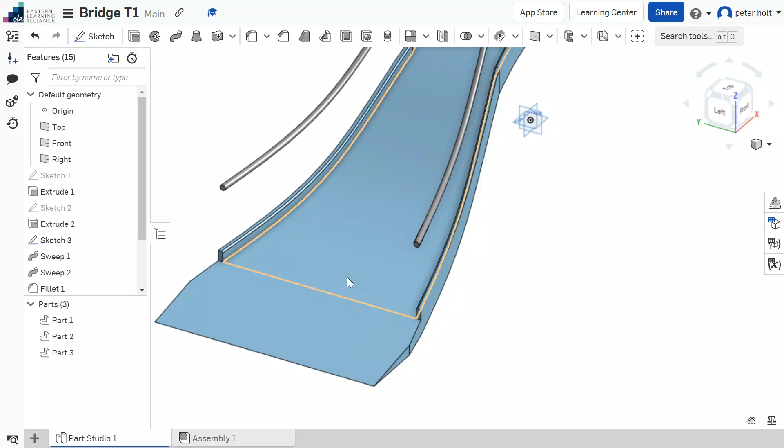Okay, welcome back. We are at the point at which we're ready to start making the uprights for our rail here, so that it's not just floating in midair, because that can't happen in reality. We've got to support it with something. So we're going to make the uprights for this.

Now, there's going to be a number of them and they're identical. So we don't want to spend a lot of time drawing lots of these shapes to extrude. What we want to do, once we've made one, is find ways of copying it. Now, we could do that by using the assembly. So we could draw one part and then we could use the assembly to position them. That would work absolutely fine.

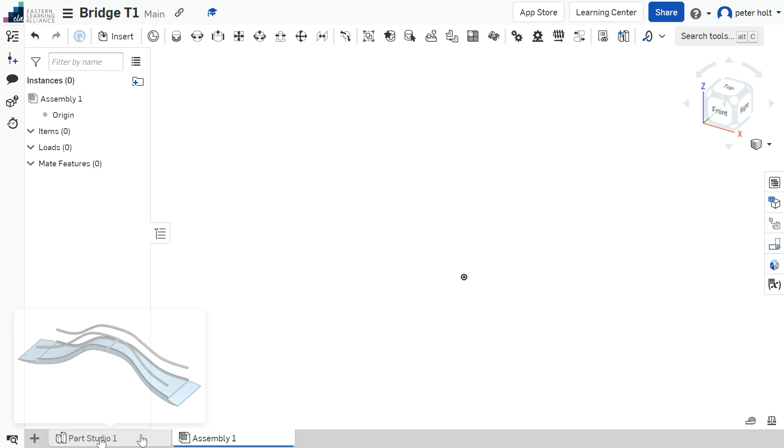The assembly drawing is, if you'll see at the bottom of the screen now, I pointed it out, next to your part studio, and you can just insert items that you have open. So we can literally pop in some of the items that we've made, and we can start lining them up and shaping them and putting them wherever. And it means that you can make objects and then assemble them afterwards.

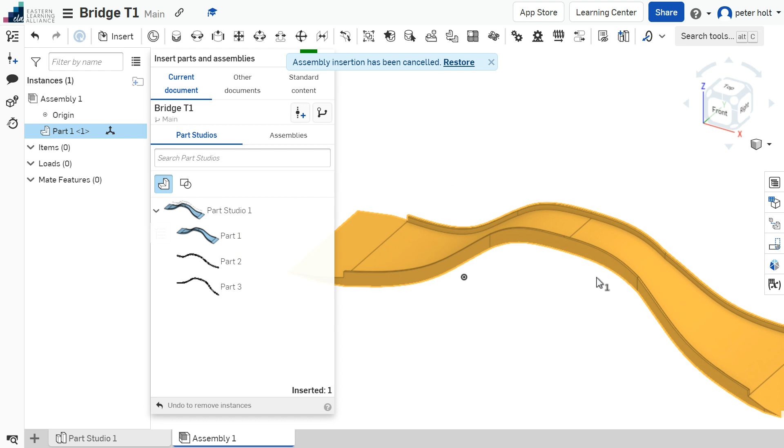So let's just close that. I'm not going to worry about it now. Let me just insert one of them actually, and I'll show you how to move it around. So once you've placed it, you click yes, I'm happy with that. And then you can select that object and you can move it so that you can get it set up the way you want it to be set up. We're not going to do that.

Instead, we're going to draw it all in the part studio because it's not that complex what we're doing. So we will use the part studio and we're going to use copying parts as a way of doing it. And again, there's lots of ways to do that, so we'll explore some of the options along the way.

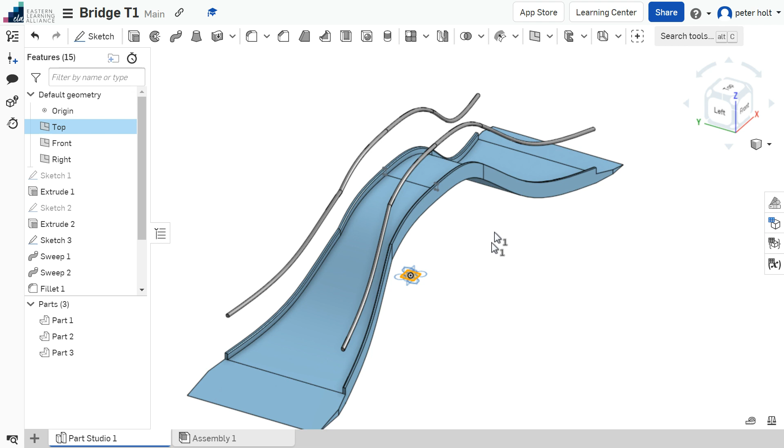So here I've got a base plane that I could use, just like I did before. I can go to new sketch, but instead of doing that, I want to make it so that I can start drawing at this level here. Now, the easiest way to do that from this position, if I go to the left view, you can see it's too low. I want to start drawing from this bed here, from this level here.

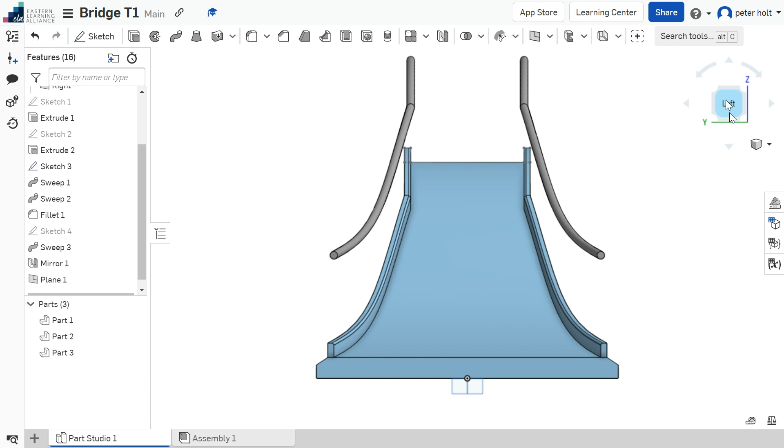So I'm going to go to this one here, which makes a new plane. And I can choose how far I offset that plane. So I'm going to make it so that the arrow is just on the right level with this line here. And I'm going to click tick. Now what that's done is it's made a new plane for me, which is higher up. And I can select it there, or I can select it here. And then I can start making a new sketch, just as I have done previously, and then I can start drawing.

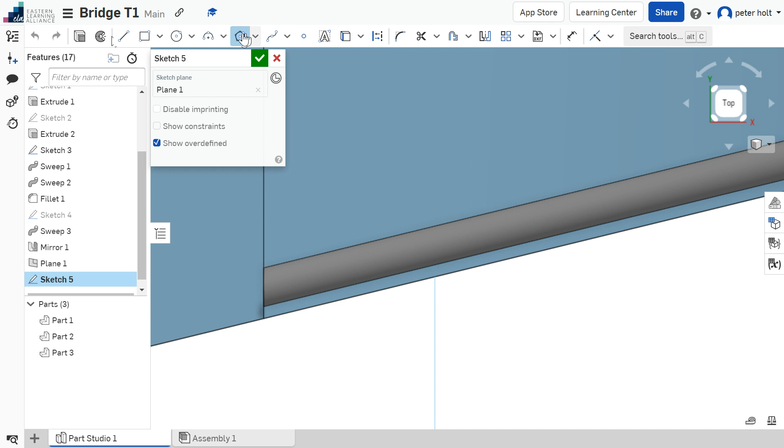So I go to my top view and use the roll ball to zoom in, making sure my mouse is in the location where I want to start drawing, because this is quite small now. And I'm going to use this different drawing tool here to make kind of a hexagon shape. It's slightly in the wrong place, so I'm just going to press Control Z and do that again. I'm just left clicking and dragging out to make this shape. And I want it to be smaller than the bar that I'm going to have there. So I'm happy with that shape and I click tick.

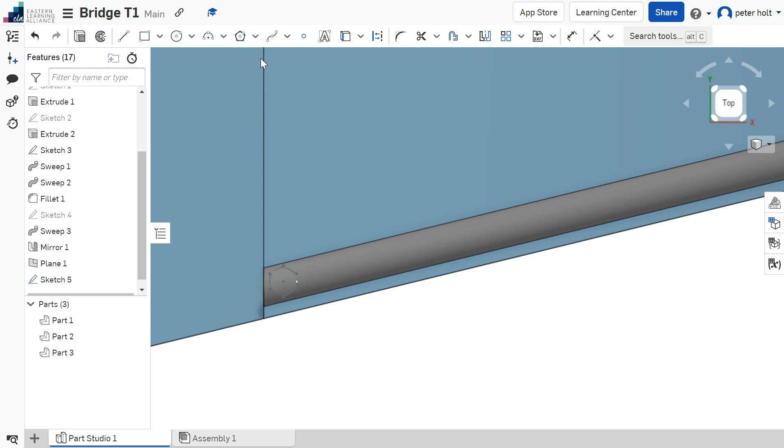Now it could be quite awkward to try and grab that. You can see it's right down here. It's tiny. It's quite difficult to get hold of. So to extrude it, I'm going to use the selection tool over here to left click and select that. And then I can extrude this shape just as I have done with others. So it goes up here. Now I do want to make sure it's a new part that it's making and it's not trying to add it to one of the previous parts that I've got.

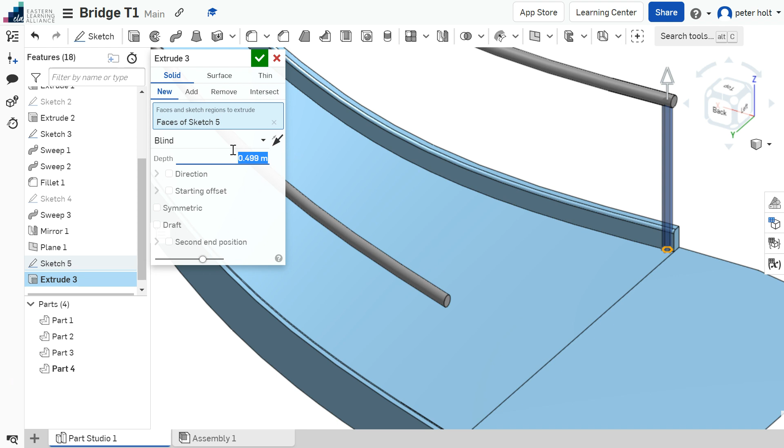So make sure it's a new solid. And then in terms of the distance, it should be about 0.5 meters there. So half a meter, it should be about right. And then I can click, yes, I'm happy with that extrusion. So that's the first bit done. I've made my first one.

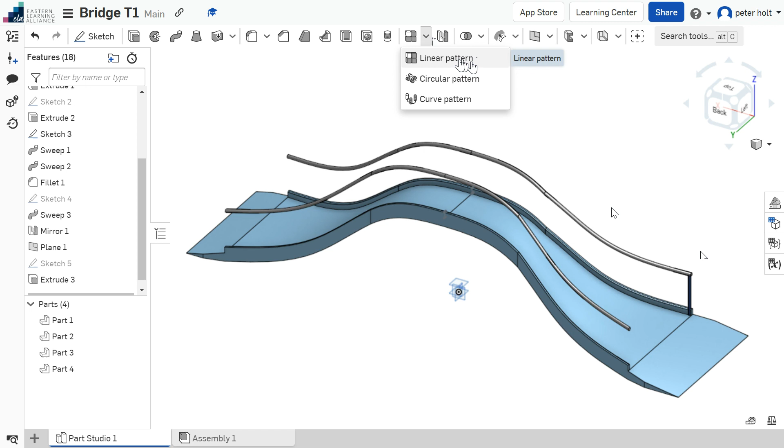I could repeat that process for all the others, but actually I think there's an easier way if we have the right tools to use. Now I could make multiple copies or duplicates using one of these. So a curve, a linear pattern, anything along those lines. I'm not going to make too many supports with mine, so I'm not going to do it this way. But you can see that if I get a linear pattern, I'll just do it for a second so you can see, and then you can choose if you want to use it.

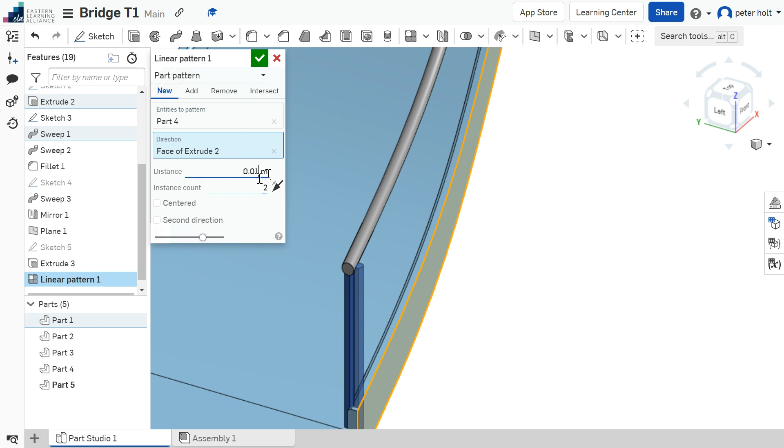I'm going to select the object, and then I'm going to select a direction for it. So the direction that I want to select, now it can't do curves, so it won't manage to do this. It will think it's the face that it wants to duplicate. So if I increase that so you can see the distance on there. So let's get rid of that 0, and you can see that actually it's going parallel to the face rather than actually what we wanted it to be.

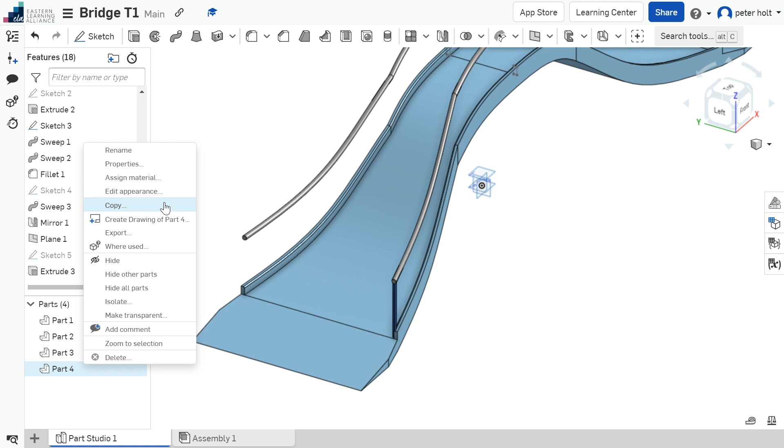So that's not going to work for me this time. I'm going to get rid of that. I'm going to close that off. What I'm going to do instead is I'm going to come over to this part menu and I can actually right click and I can copy it. And if I copy a part, it actually gives me some options. So straight away it says, do you want to translate it?

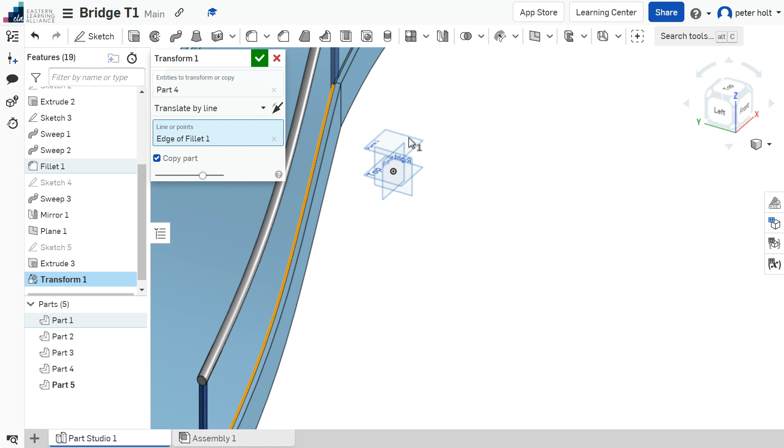So I could just move it with this copy of it, or I could translate it by line, distance, and I've got all these other options. I could copy and paste scale. So I'm going to try translate by line. And if I select this item here, it's going to pop it up to the end where that joint is, which is actually quite nice for me. So I actually quite like that object. So I've got part 4 is being copied over to halfway up. There it is. So I've now got 2 items.

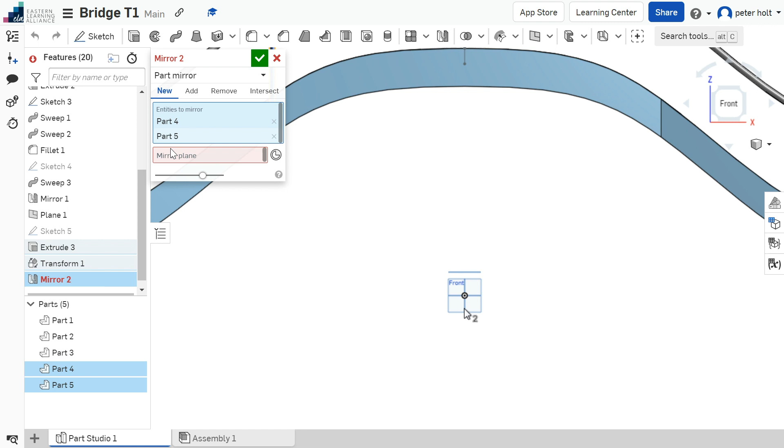So with those 2 items, part 4 and part 5, I can actually use the mirror tool. So the mirror tool here, let's go back to here. And this time it's looking for the plane that I want to use as a mirror, which is this one halfway over. And you can see it's popped those in place straight away for me. Well, that was super easy. So there I go. I've got the whole of this side done. And guess what? I can do that again.

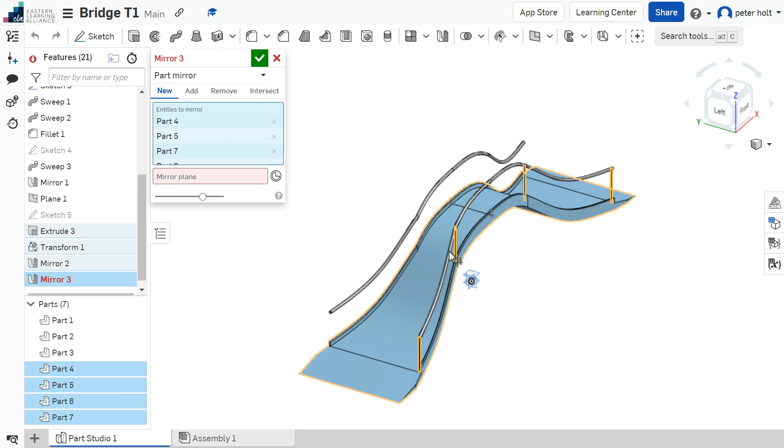So now I've got parts 4, 5, 6, and 7. Let's make sure I've got them selected. And again, I can mirror them, and mirroring them to the other side. Now remember, this only works because I drew everything on that central area. So it's getting quite difficult to select that central one. So if I pick the right one here, hopefully, oh, I've got to select mirror plane, that's why. So if I pick the right one there, you can see it duplicates over.

And because I used the center of my drawing, all of these tools are working nicely for me. If you've drawn it off to one side or to an edge, you'll have to do it another way and it will take you slightly longer. But you can see that's looking pretty decent now. All of my parts are drawn.

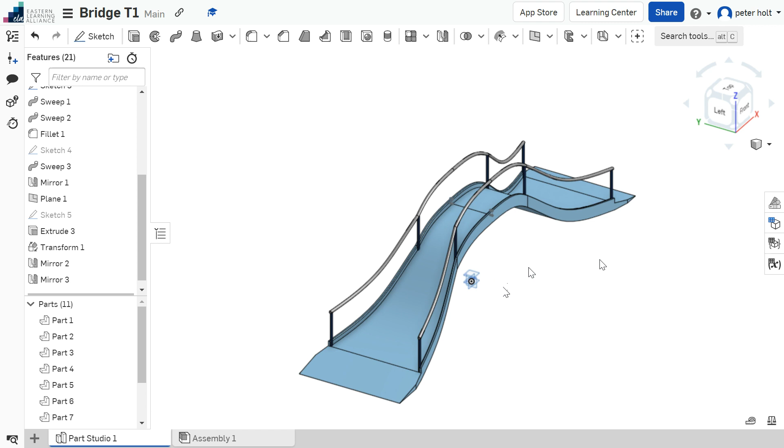So that leaves me with just one thing that I want to do, and I'll do it in the next video. We're going to add some materials to this with some colors on it, and then we can make a 2D drawing, and we can even save this to 3D print it. So we'll have a quick look at how we do those items in a minute or two.